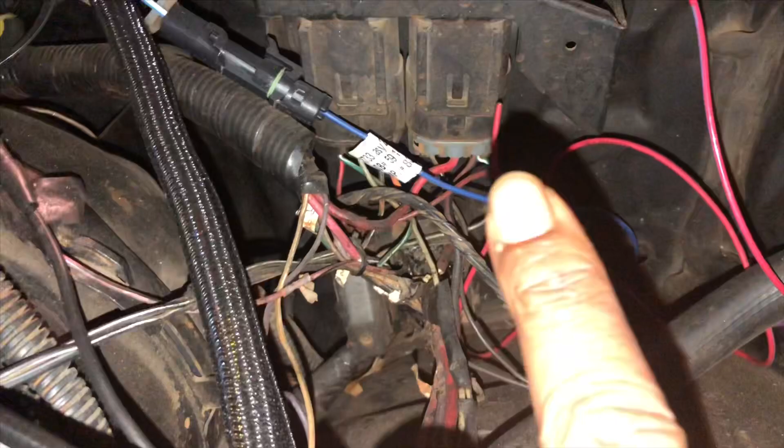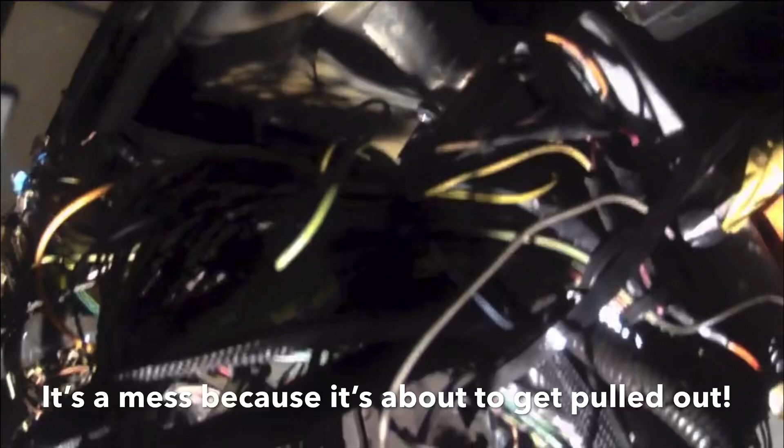Okay, right here, I know it's a lot of wires, but right under here, right under your relays, is your C100. You unscrew that bolt right there, and it comes off this way. All right, and I'll show you guys a pinout later. Looks like a lot of wires. It's because it is a lot of wires, but once you break it down one by one, figure out where each one goes, it becomes less complicated. It looks like spaghetti until you get everything lined out, where it needs to go and bundled up. But alright, so let's get my PCM down.

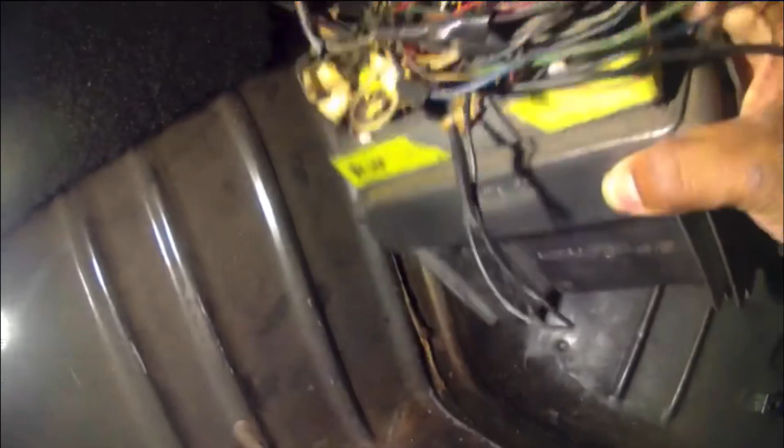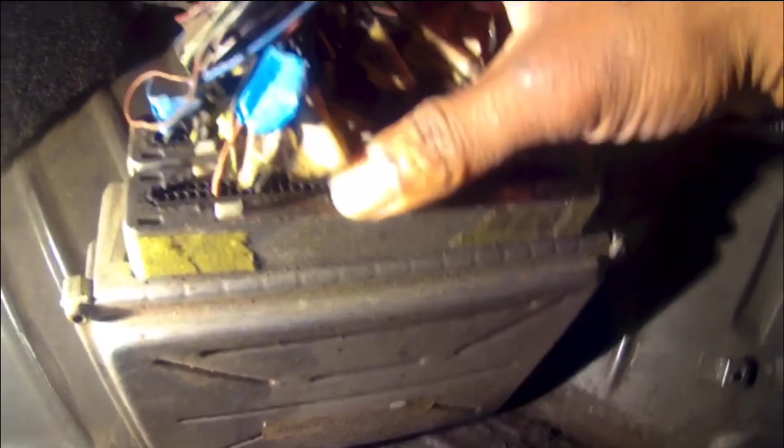Alright, there it is. Woo! That's a lot of stuff. See, I labeled it blue on one side. Got a lot of wires on here. And red on the other side. And see, I actually went through and put labels on each one of these to know where it goes. You see, R60.

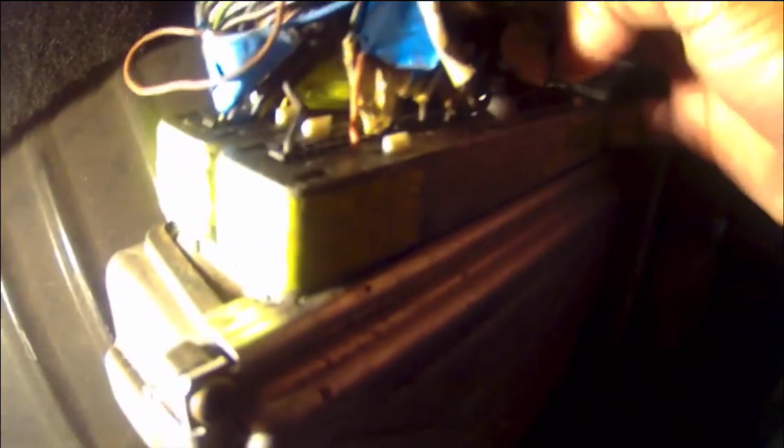So once you look at your pinout, it will tell you what each one of these wires is and where it goes. So each one of these wires goes to a corresponding sensor, whether it be your TPS or your mass airflow if you're using one. My car is speed density, so I don't have it. Or whether it be your alternator or your wires running to your transmission, which is a separate pinout, which I'm not using. I was using it when I had a 4L60E, but now I have a Turbo 400, so I'm not using any wires going to my PCM.

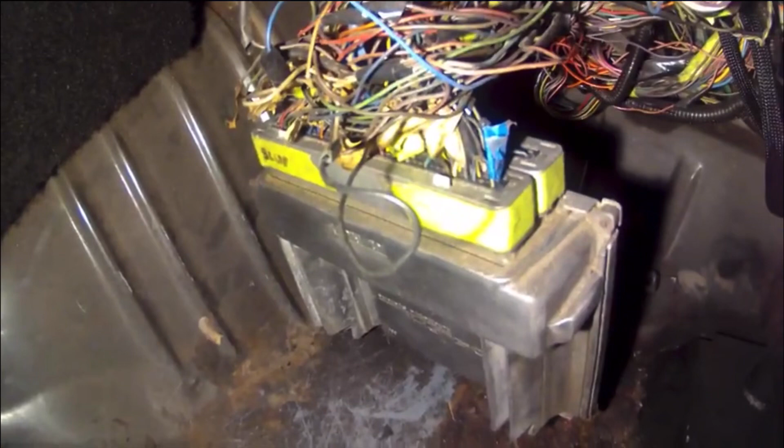So throttle position sensor, mass airflow, coolant temperature, each one of your injectors, your O2 sensors, all of those come right in here. Okay. Now, there's no need for me to actually look at this here. That's a lot. It looks like a lot, but it's not really a lot. So look at the pinout and I'll show you where everything goes.

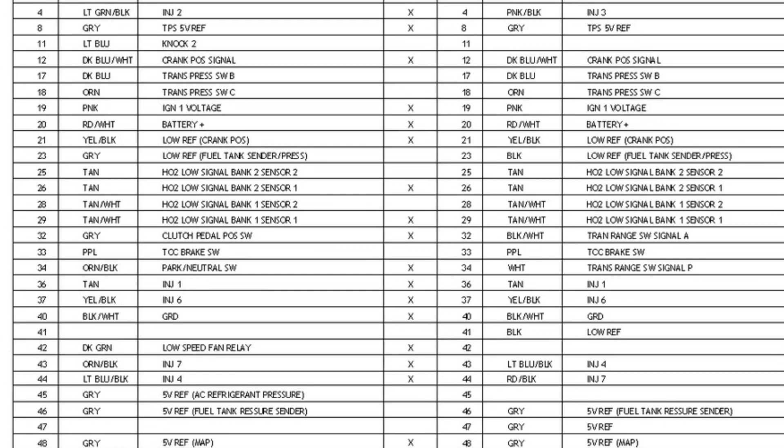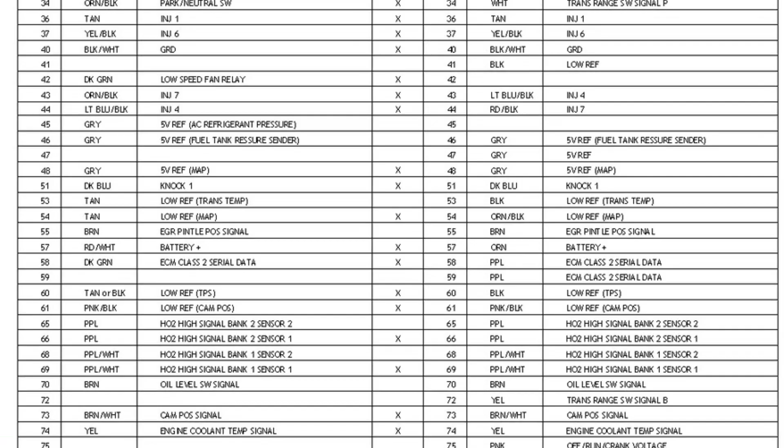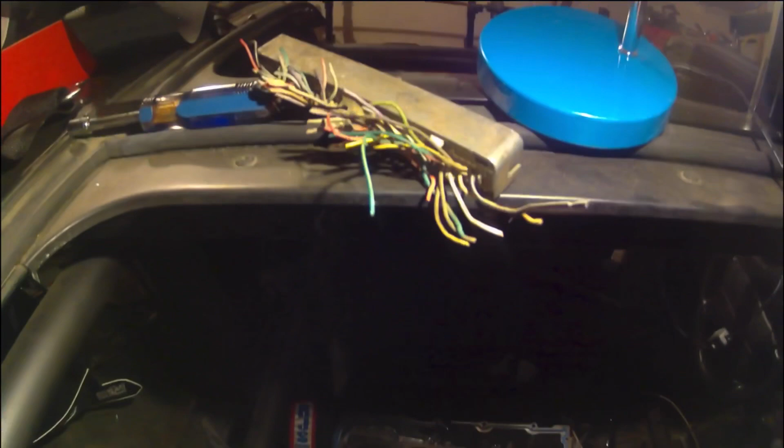So if it's already on the computer, you're gonna have to take it off. Okay, it is a 7mm. It's a 7mm to fit on that, it'll take that screw loose, not nut, screw. Now once you take it loose, you look on the other side, both of these will be the same, okay? On the red or the blue side, or I think another one is green and blue for a different PCM. But mine is out of a 2002 Camaro, I think, and I had the red and blue ones. But yours could be green and blue.

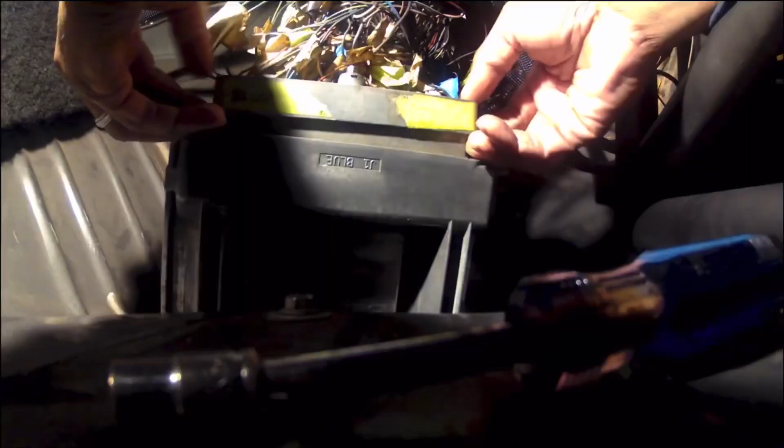When I say green and blue, it'll have plastic covers over the pins. One of these will be blue, and on the other side of the computer it'll be red or green. Okay. So I'm not gonna reuse this. This will probably end up going in my Nova. I'll probably redo the wiring harness again to make it match for the Nova. So I've got my wiring harness. It's not really a standalone because it's wired in with my factory wiring harness. It's been on there for a while.

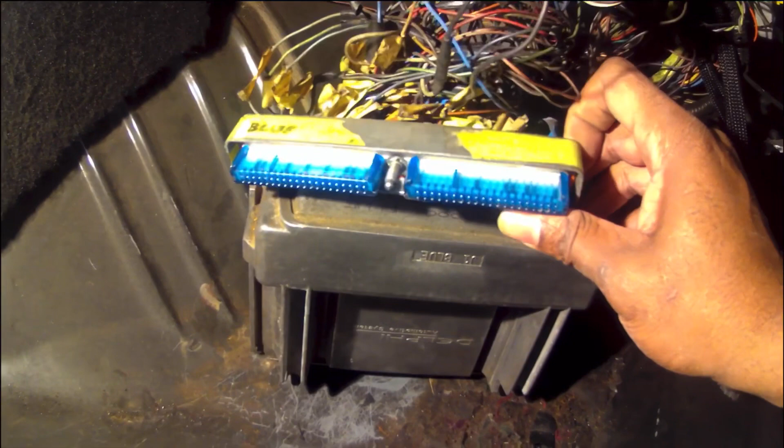Alright, so that's what it looks like when you gotta take it off. You're gonna have these blue clips in it. And the other side will be red. That one will be red because I have a blue and a red PCM. Like I said, you may have a blue and green one.

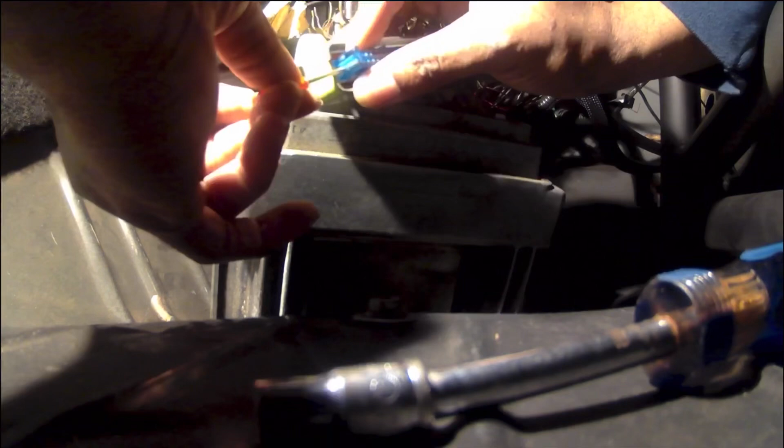Alright, so to get these pins out, you're gonna have to pop these tabs off. You're gonna need either a small screwdriver or a pick to push in the tabs on the side. Not the pins, but the tabs. I need to push those in. Okay. So let me get a screwdriver real quick and push those in on both sides. Take that side off.

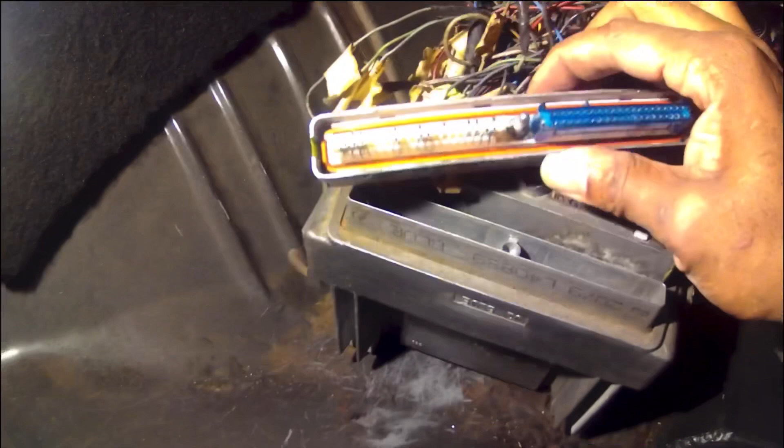There we go. Got it off. It comes right off. As soon as you push it in, it comes right off. Right, so now you got your pins, your pinouts. Okay. This is what's corresponding with your pinout sheet. Okay. And you remove those. You remove these. You may have ones that you're not gonna use.

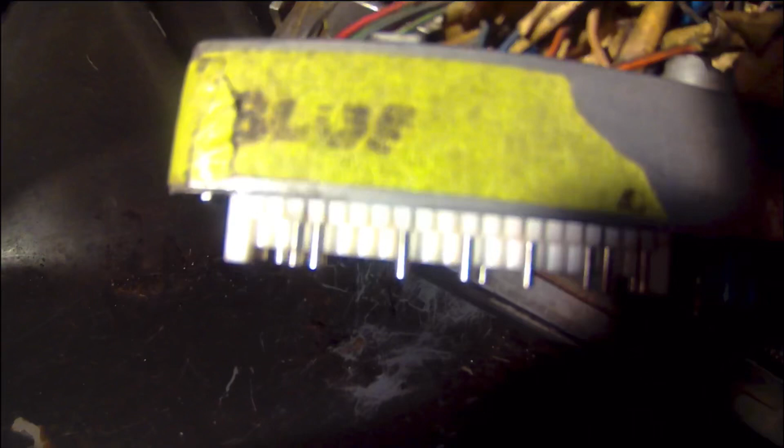So what you want to do is, or what I did, I took them all out first, and then went back and pinned it according to the sheet that you saw earlier. So the way you remove these is the same. You take this, the little screwdriver, pull this tab up, and you just push the pin out. So I'm just gonna push the tab up and push the pin out. Tab up, push the pin out.

Alright, that's all you gotta do. Push the tab up, pull the pin out. Easy. And now I'm gonna leave mine in. Like I said, it's the same thing on both sides. Alright, so now you just want to unpin all of these. Just unpin everything so you have just a pinless connector.

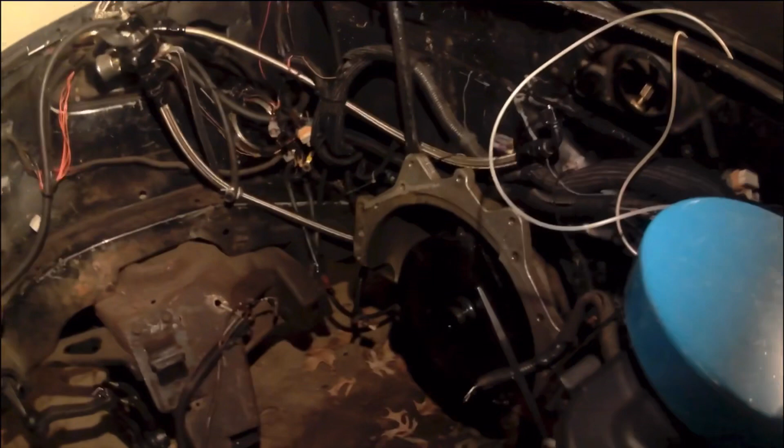And then you have to identify what each sensor is. Obviously you got 8 injectors. You're gonna have 2 wires per injector. So that's 16 wires right there. Now my injector fuse wires are wired a little bit different than probably most of you guys that run standalone ones. Anybody that's familiar with Pocket on thirdgen.org, I've wired mine in almost exactly how he wired his in.

Because mine was a TBI car when I first had it, and it had 2 fuses per injector for the TBI car. I wired 4 of my injectors into 1 fuse and the other 4 into the other fuse. But I'll get into that a little bit later.

Alright guys, so you can look under here. Here's where my 207 is, okay? And when I say I'm routing the pink wires to it, all I'm doing is running the fuse side of the injector to this. So I'm running all driver side injector fuse sides to this one, and the same for the passenger side.

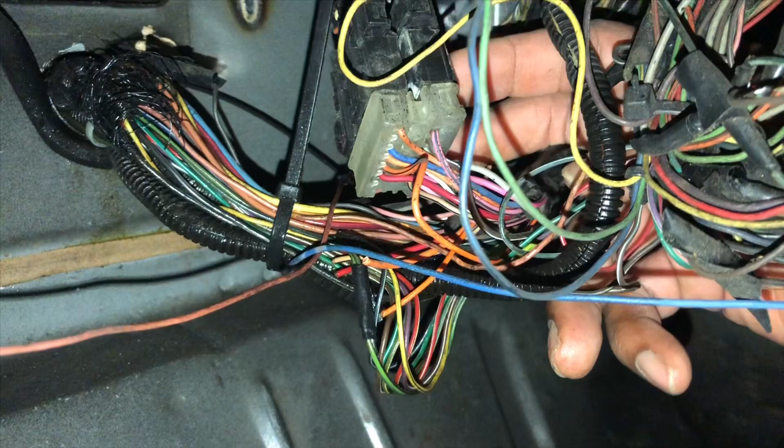So I'm using one fuse, since my car was a TBI car originally, and it had 2 injectors for throttle body injection. I'm using one fuse from the original harness for one side of the injectors, and one fuse for the other side. See, this is your 207.

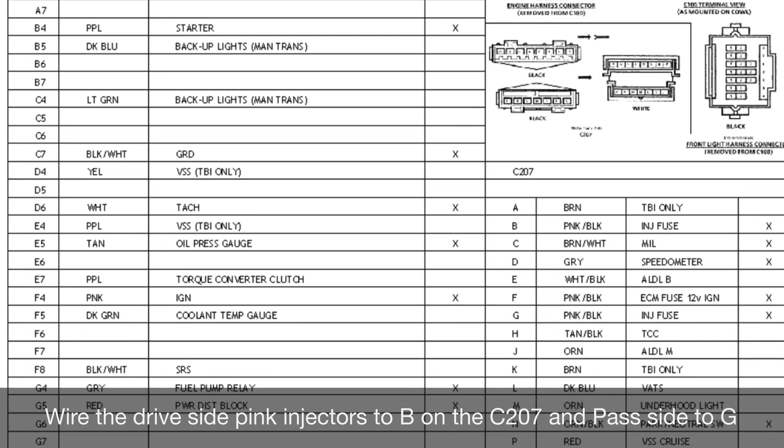Also, if you have a 93 and older car that had OBD1 connectors, you'll want to go to a junkyard and get any newer car that has an OBD2 connector, okay? And you want to get that and hook that up in your car, because you're not going to be able to connect your PCM with your laptop unless you have that OBD2 connector, right?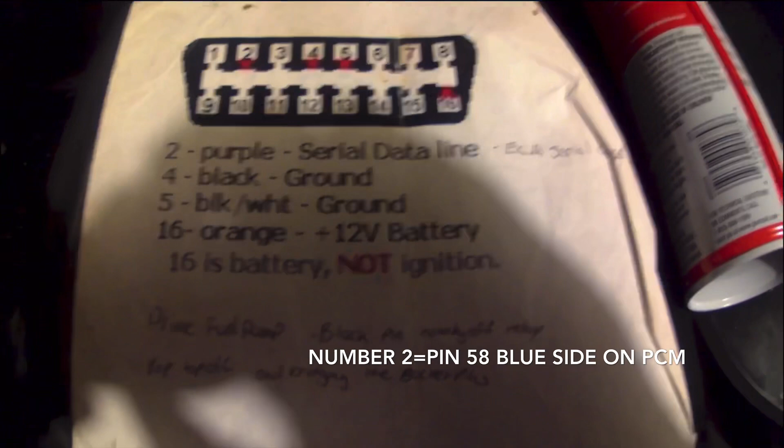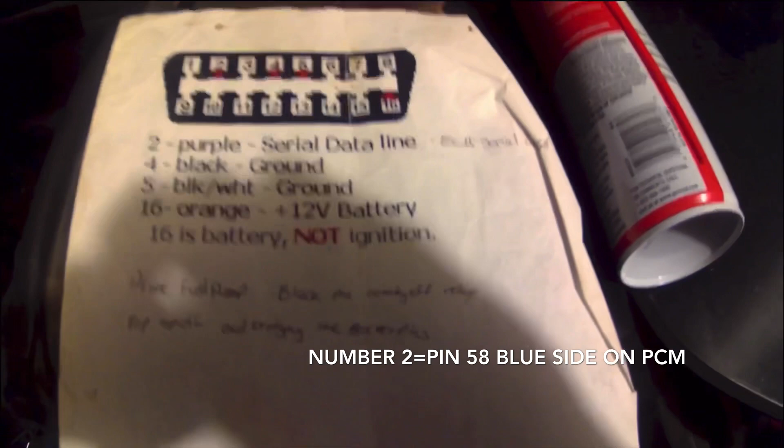So here is the pinout for your OBD2 connector. So you go to the junkyard and you find this in any newer car. This is going to be in any new car, okay? Just cut the wires and everything with it, unbolt it, bring it with you. If you're in a junkyard, you're some kind of mechanically inclined. Okay, so take your bolts loose, your screws, whatever's holding this under the dash.

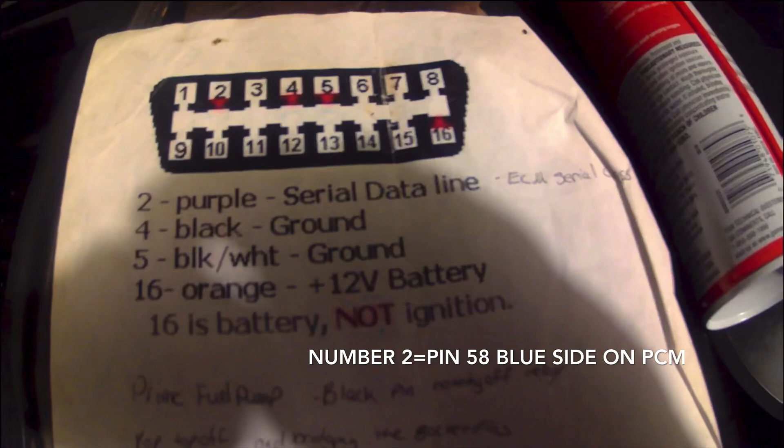Cut all the wires that are next to it, okay? And just bring all the wires with you, just a couple of inches, maybe 5 or 6 inches would be good enough. Just something that you can strip down later and solder new wires to, so you can run it to your PCM. And as you can see, this is how it works.

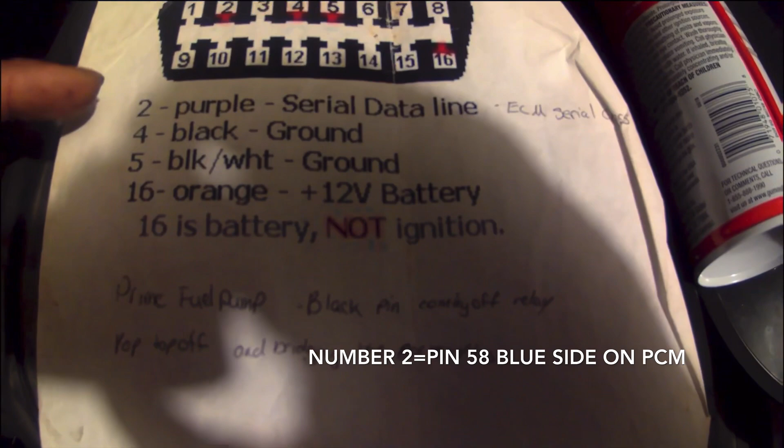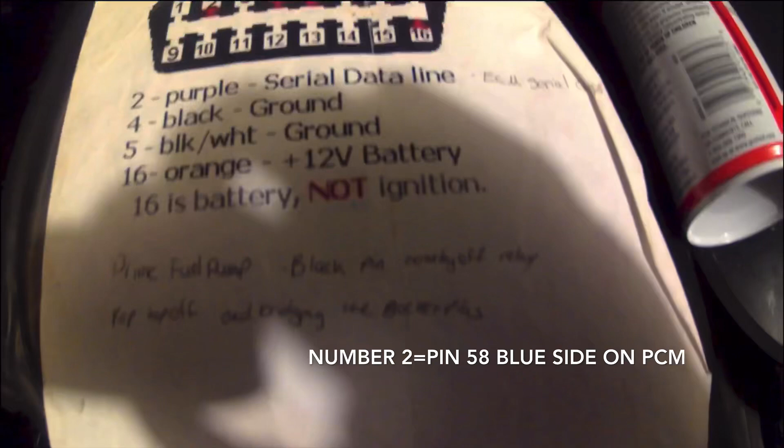You put your pin 2, that's going to be your purple wire, right? That's your signal going to the ECU, the ECM, PCM, whatever you want to call it. It's going to your computer, okay? The number 4 one is going to be your ground. 5 is also going to be a ground. 16 is going to be battery, okay?

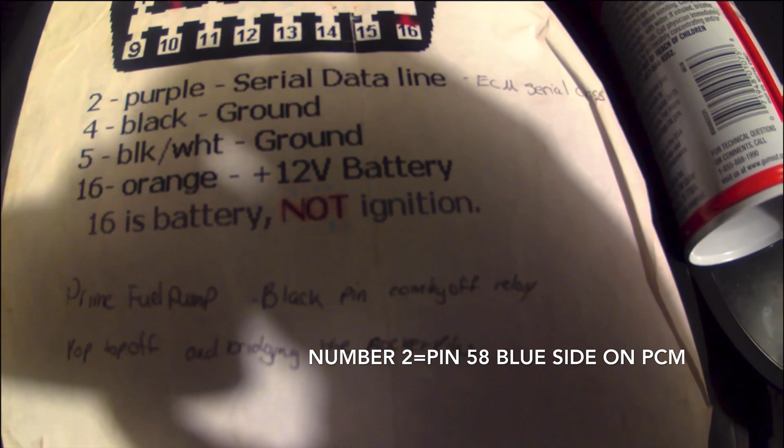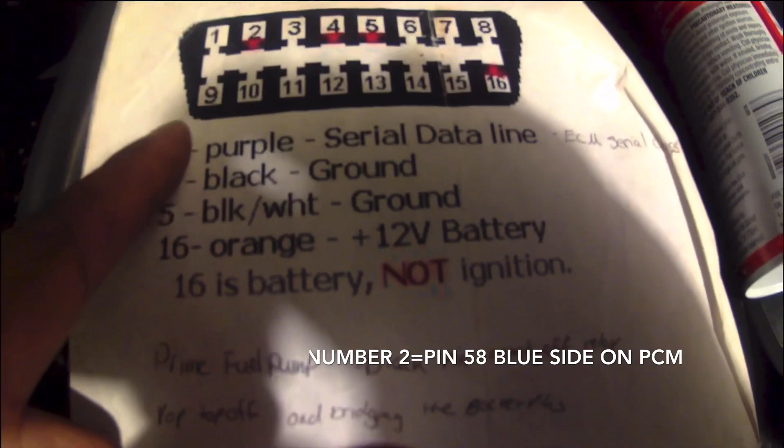And I see it says not ignition. That's your constant battery. That one goes straight to your battery. That's what you hook up. So it's gonna always have 12 volts on it. That way you can plug into it and read something when the car is not switched on. All right. So pretty much that's it. That's all you need. So if you don't have that in your car, you go to a junkyard, you get one, and you change those pins the way you need them. Those are the only 4 ones that you need.

Gonna do it for this video. Hopefully that shed a little bit of light on connecting your LS1 harness to your 3rd gen harness and being able to use your factory gauges, your factory speedometer, the battery gauge, and whatnot, without actually having a complete standalone harness.